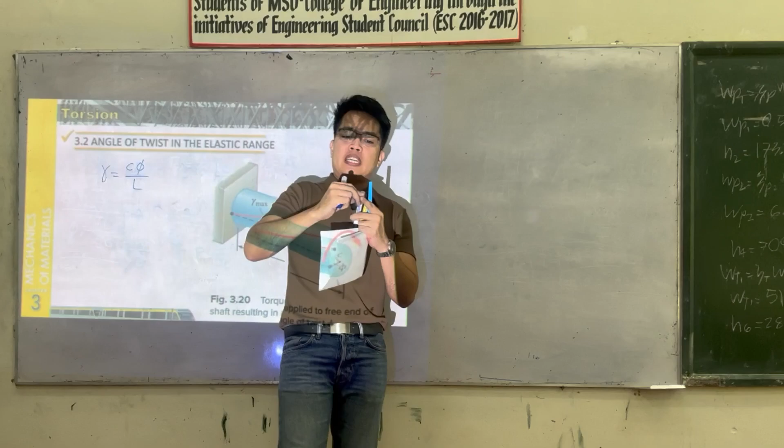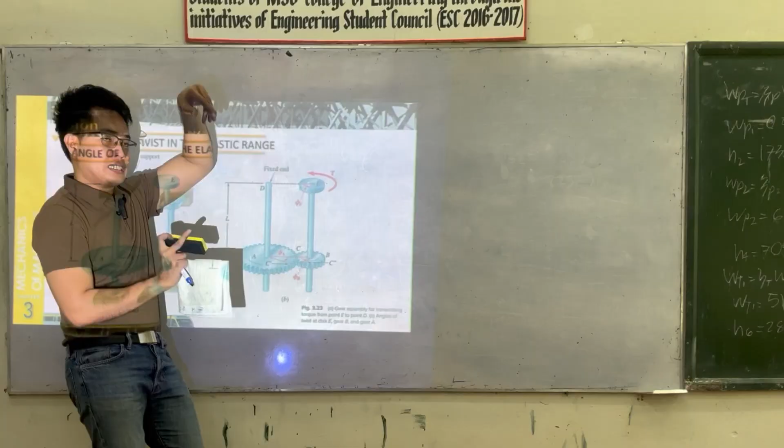This is Sir Jean Air AJ, welcome to Chapter 3 of Strength of Materials, Torsion, Part 7 of 7, Angle of Twist in the Elastic Range. Sample problem 3.4.

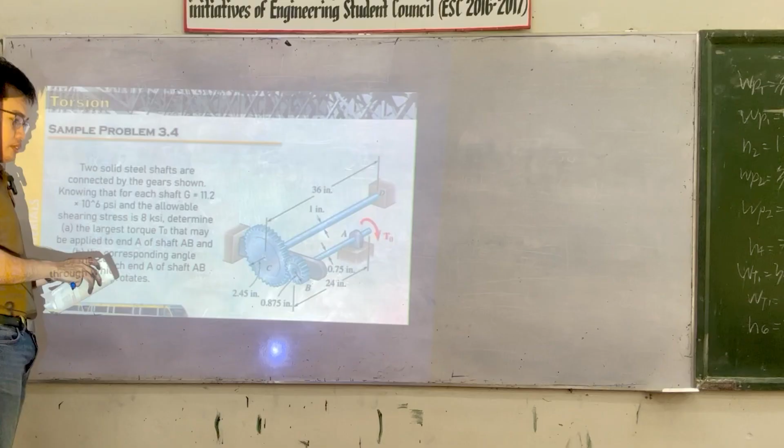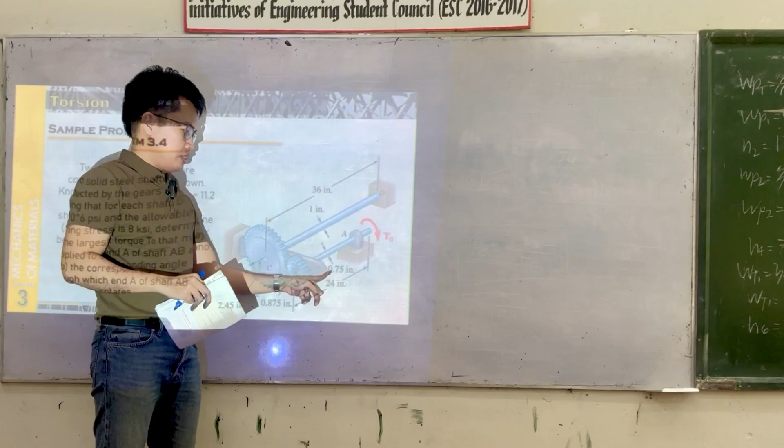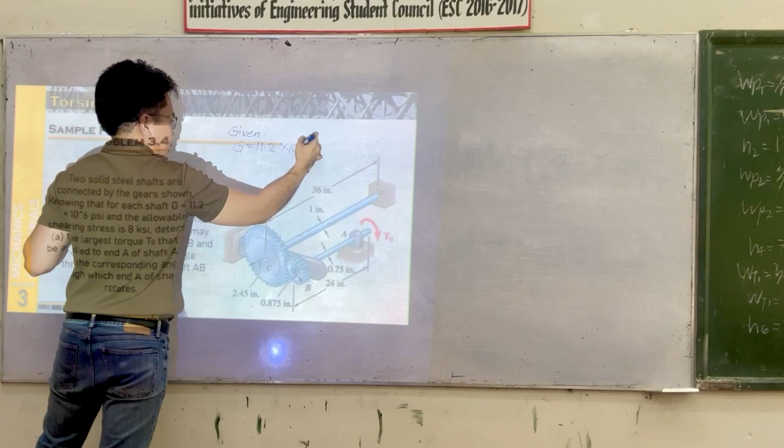Given: G is equal to 11.2 times 10 to the 6 PSI. And the allowed shearing stress is equal to 8 KSI.

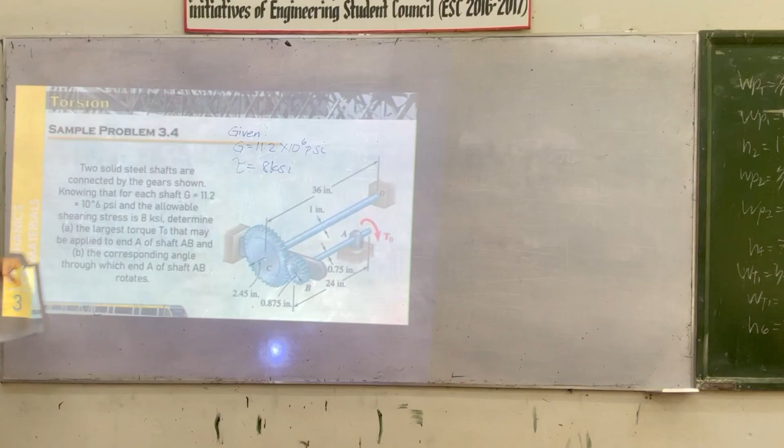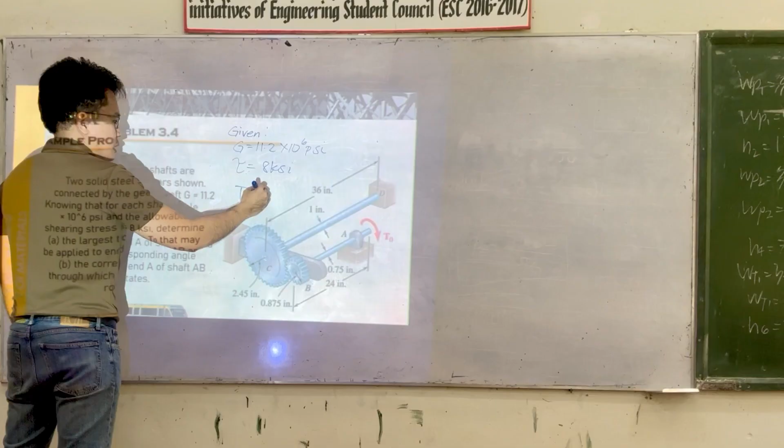The question: determine the largest torque T0 that may be applied to end A of the shaft AB.

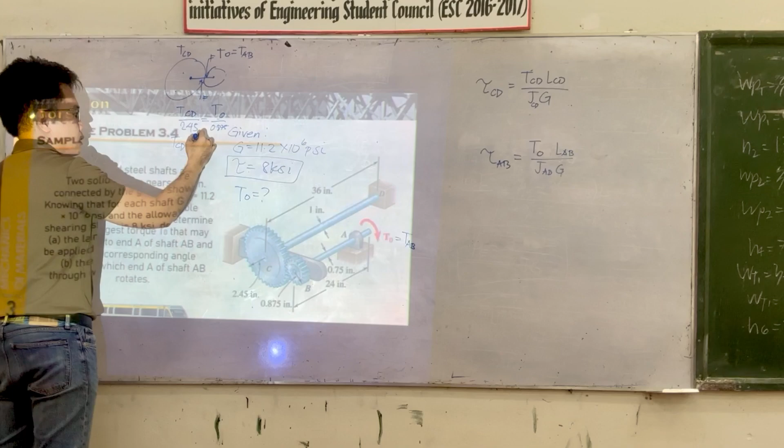So therefore, TCD over its radius 2.45 is equal to TAB, which is our TO, divided by the radius 0.875. So TO can be calculated using 0.875 divided by 2.45, or flipped: TCD is equal to TO times 2.45 divided by 0.875, which gives 2.8 TO.

Take note: TCD is just 2.8 TO times LCD divided by JCD times G.

Let's substitute. Our tau limit at 8,000 PSI is equal to 2.8 times TO times LCD, which is 36, divided by J, which is pi over 2 times 0.5 to the 4, times G, which is 11.2 times 10 to the 6.

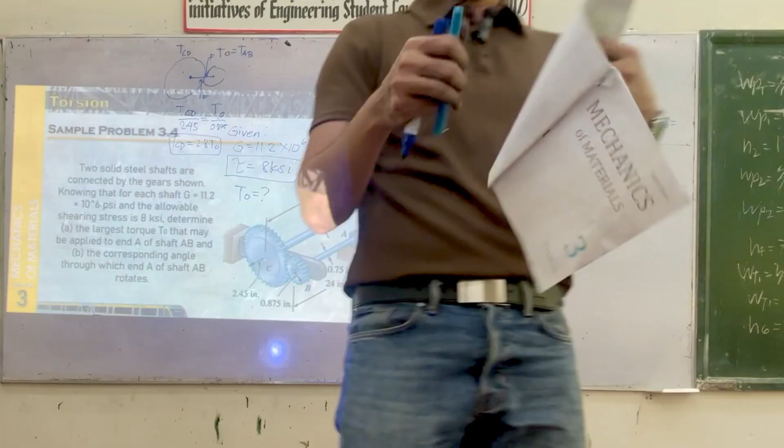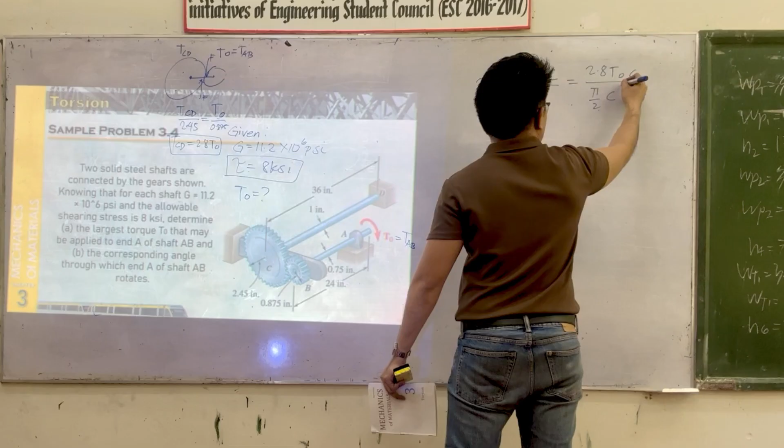So what is our shear stress formula? We have tau CD equals TCD times C over J. TCD is 2.8 TO times C over J, which is pi over 2 times C to the 4. This cancels out to become 3.

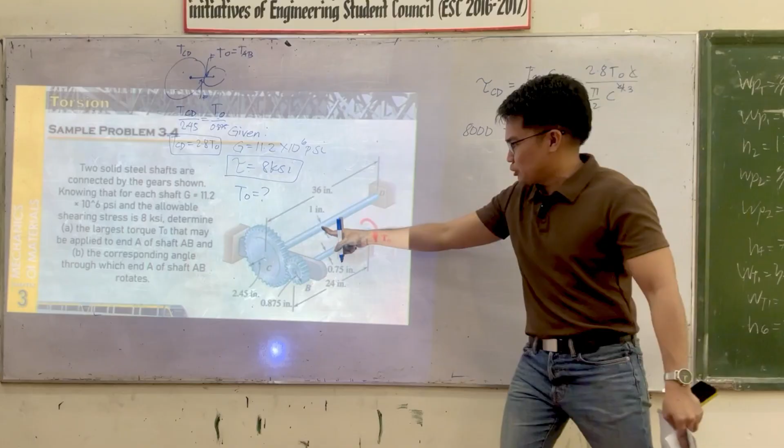Substituting, 8,000 is equal to TCD, which is 2.8 times TO divided by pi over 2 times the radius 0.5 to the 3. Calculating this, we get TO equals 560.9.

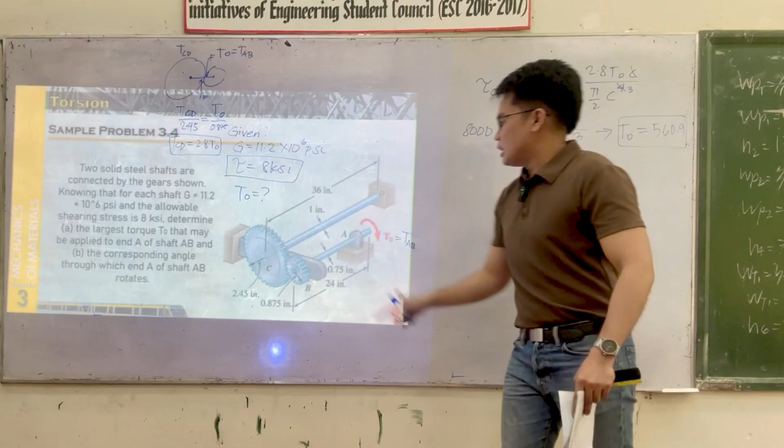Now for this other shaft, let's analyze shaft AB. The formula is TAB times C over J. TAB here is the same as TO. So this becomes TO times C over pi over 2 times C to the 4. The C cancels, becoming 3.

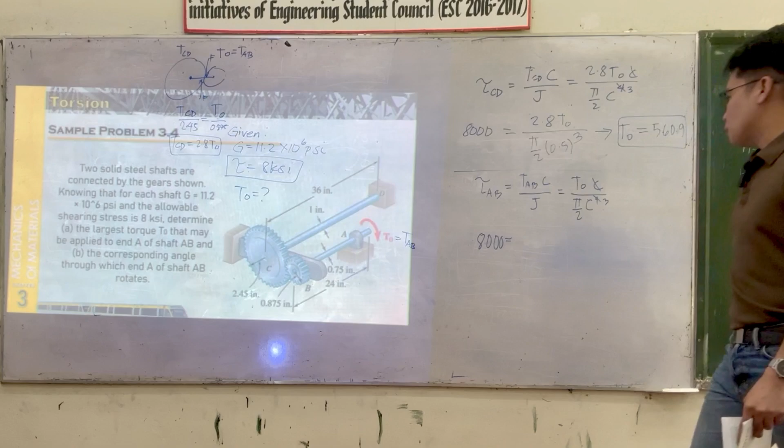Let's substitute: 8,000 is equal to TO divided by pi over 2 times the radius.

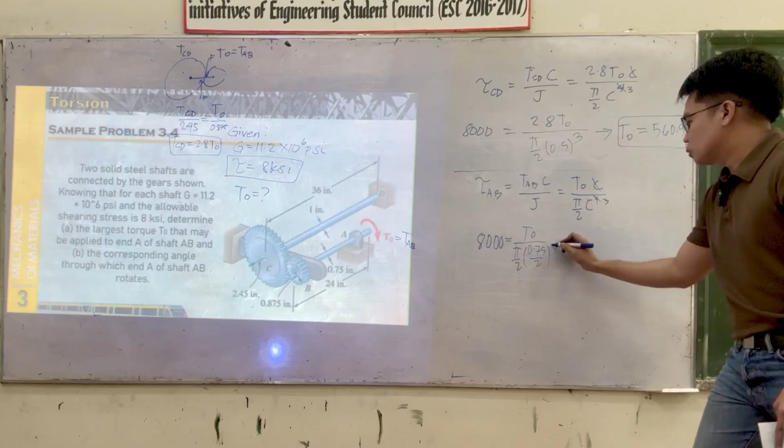0.75 divided by 2 to the 3. So ano yung makukuha natin dito ang TO? Ano yung makukuha natin TO dyan? 663, no? 663 pound inch. Pound inch. Ayan. So dito din, this is pound inch.

Sabi ng problem, sir, yung gamitin mong TO is 560 para hindi lumagpas ng 8,000. Sabi din ng isa, sir, yung gamitin mong TO 663 para hindi lumagpas ng 8,000. Kasi sabi ng isa, kapag lalagpas daw ng 560, lalagpas din sa 8,000. So ano yung pipiliin mong TO? This one or this one? Para masatisfy yung dalawa.

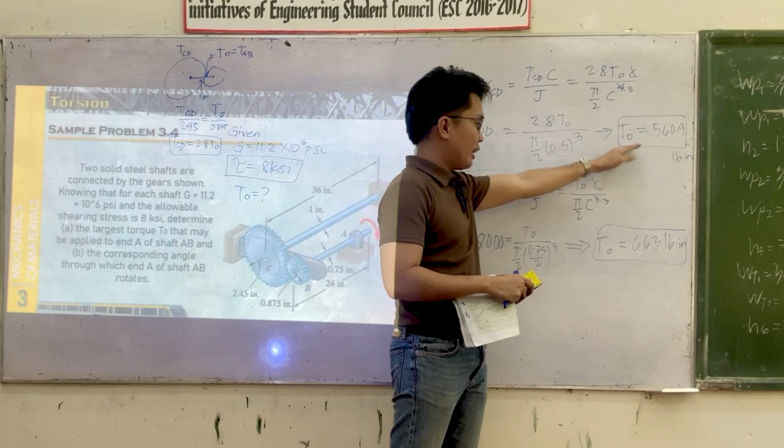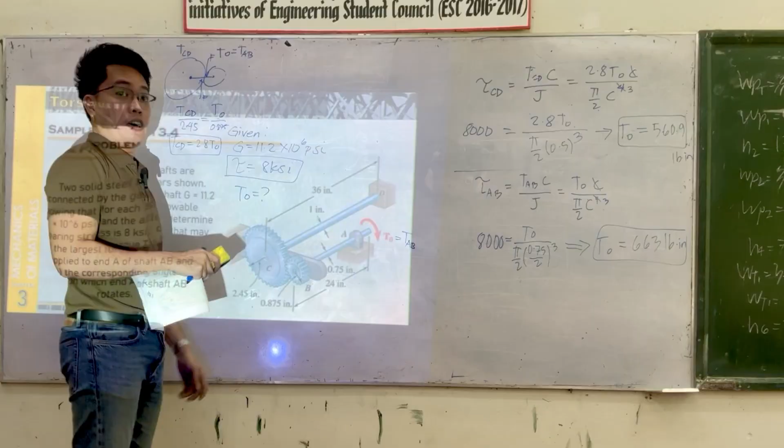The smaller, the bigger. The smaller, no? Kasi kapag lalagpas pa dyan, lalagpas na dito. So ito lumagpas, so for sure lalagpas na sa shaft. Anong shaft to? Shaft CD natin. Gets nyo ba, mga engineering kayo, no? So ayan, yung TO natin dito, ito yung piliin natin. TO is 560. Klaro? So ayan lang.

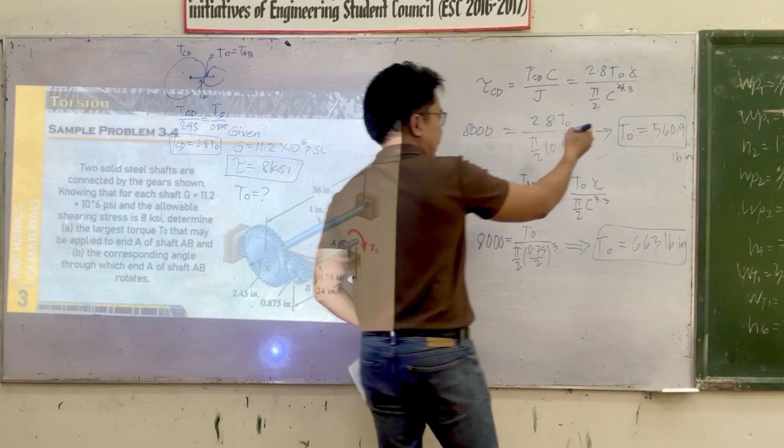So the next question: the corresponding angle through which end A of shaft AB rotates. So ano yung hinahanap? Ito yung answer natin sa letter A. How about sa letter B? Ano yung hinahanap sa letter B? Palagay nyo, anong variable yung hinahanap? The corresponding angle through which end A of shaft AB rotates, that is our theta, I mean phi.

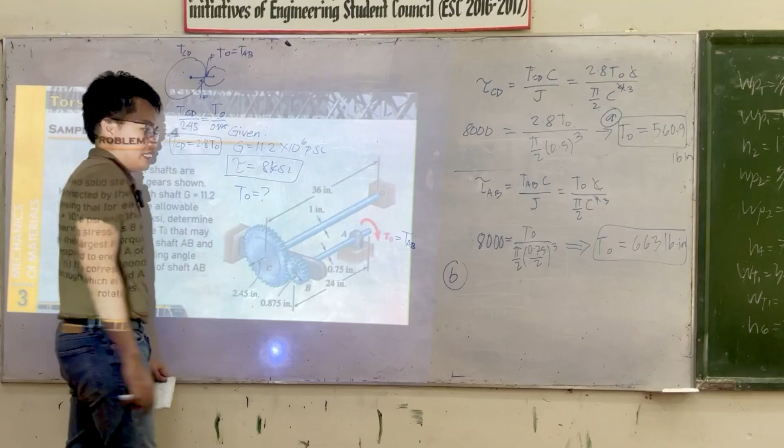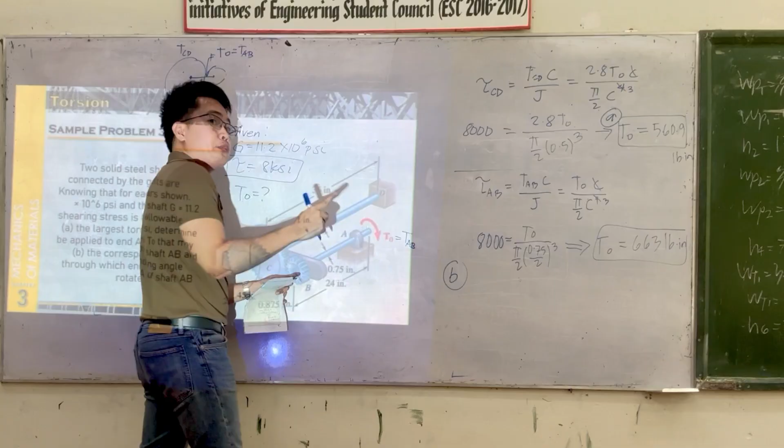The corresponding angle through which end A of shaft AB rotates, so yung phi A natin. But take note, yung A natin moves relative with B natin. So yung nakuha natin torque dito would somehow cause an angle of twist na phi A with respect sa B. So the angle na makukuha natin dito na hinahanap sa problem is yung phi A with respect sa B natin, kasi yung gagamitin natin formula is itong TO.

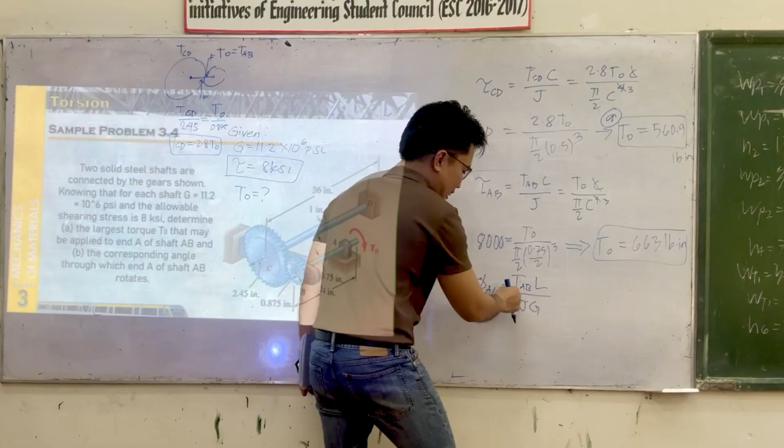So sige, ano yung angle of twist of A with respect sa B? Ano yung formula? T AB L over JG. Ano yung TAB natin dito? This is our TO. So ayan, so substitute lang natin.

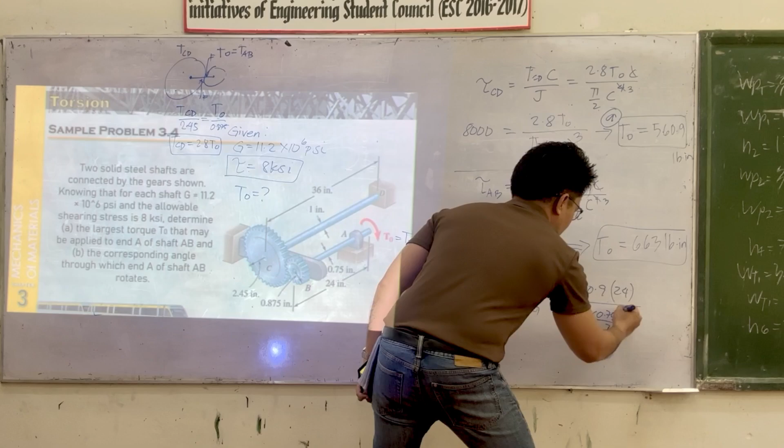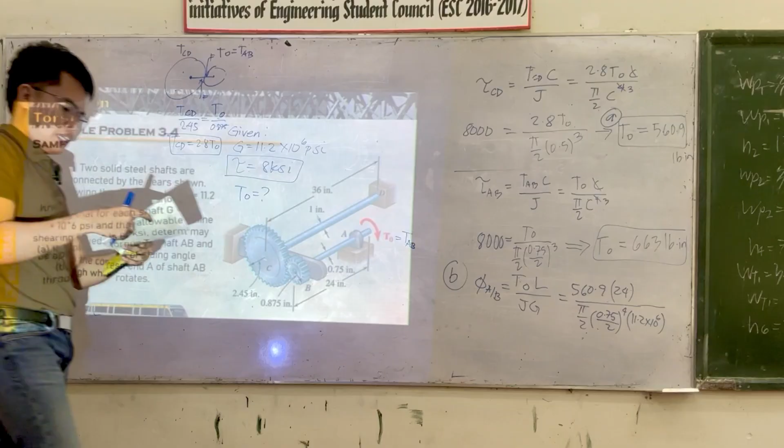We have 560.9 times the length is 24 divided by yung J natin, solid man. So we have pi over 2 times 0.75 divided by 2 to the 4 times the G, which is 11.2 times 10 to the 6. So ayan lang, the angle of twist, isulat ko na lang, no? It's 0.0387. Okay, right.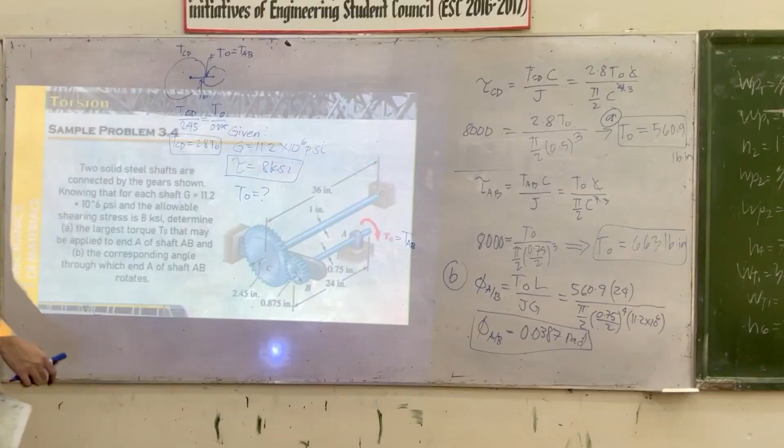So ayan lang, no? Ay, di pa tayo tapos. Angle A yung hinahanap, no? Phi A, sulat natin dito. Phi A with respect sa B is just phi A minus phi B natin. So ano yung phi B natin? Nakuha na natin yung phi AB.

How about, hanapin natin yung phi B. Ano yung phi B natin? Ano yung relationship ng phi B sa phi A natin? Kanina, ano yung mga problem? Di ba? RA phi A is just equal to RB phi B. So yung phi B natin is just equal to RA over RB times phi A.

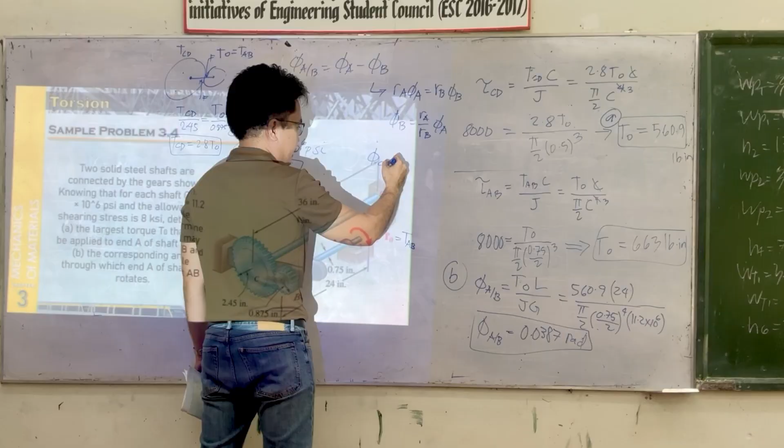Now ano yung phi A natin ulit? Di ba kanina, ano yung sabi natin? Phi BC, phi C with respect sa D natin—CD pala, no? Sa C pala to. This is C, yung notation natin mali, no? C. So ayan.

Yung substitute natin is phi B. So this one here is phi C. Tama? So ayan, ano yung phi C natin? This is phi C minus phi D. Di ba ito siya is fixed? No? So kung fixed to siya, this one is 0. So therefore, yung phi C natin is just phi C with respect sa D.

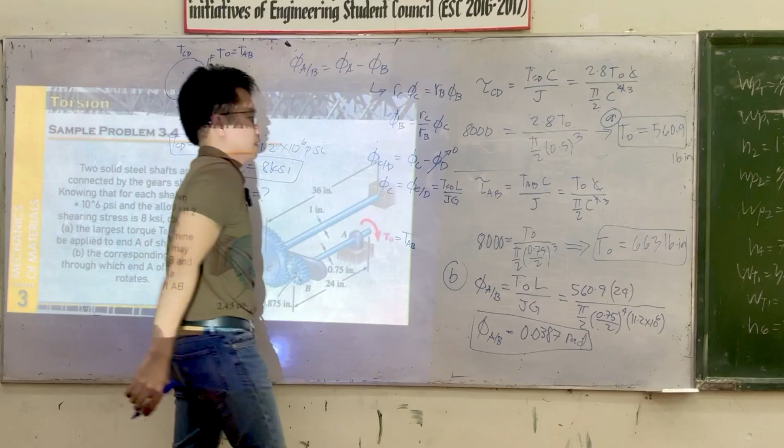Ano yung phi C with respect sa D? Yung angle of twist sa shaft na to. Tama? So ano yung formula? It's TCD L over JG. Sige, so calculate natin dito.

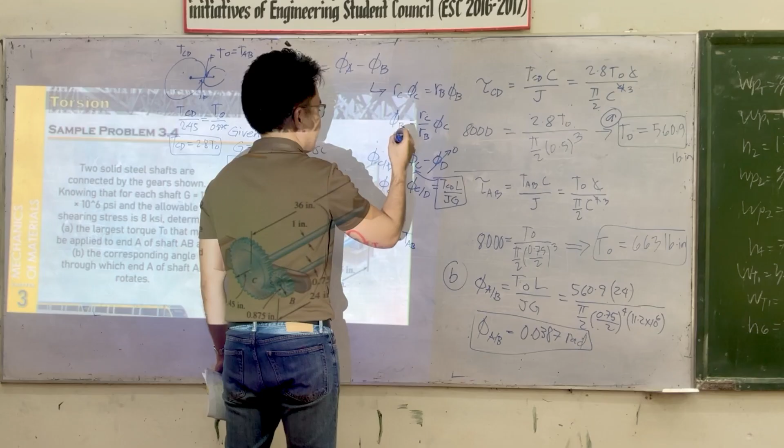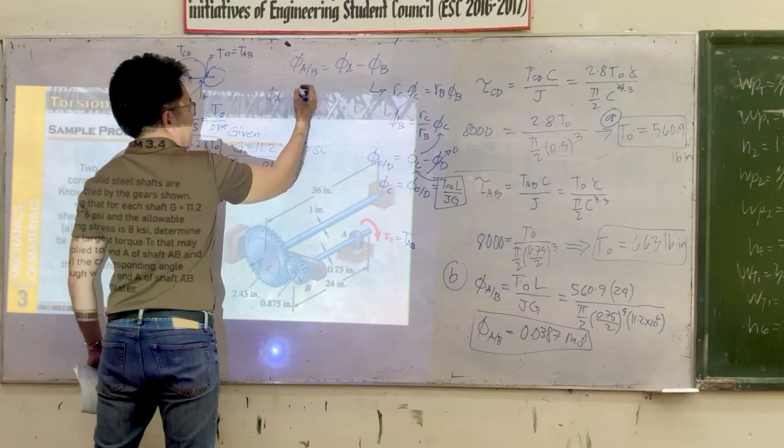Taasan ni, oy, ito na lang no? So this one here, i-substitute natin sa, this is our phi C. So this one here is the same dito. So ayan, RC over RB, then substitute natin dito. O sige, sulat na lang natin, no? I-rearrange ko lang to: phi A is just equal to phi A with respect sa B plus phi B natin.

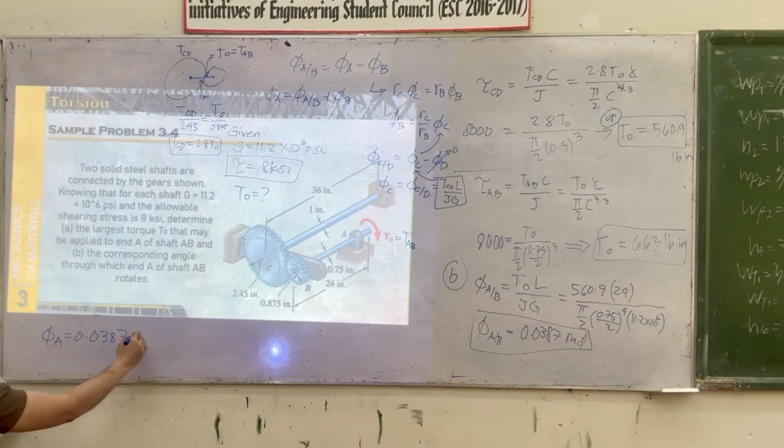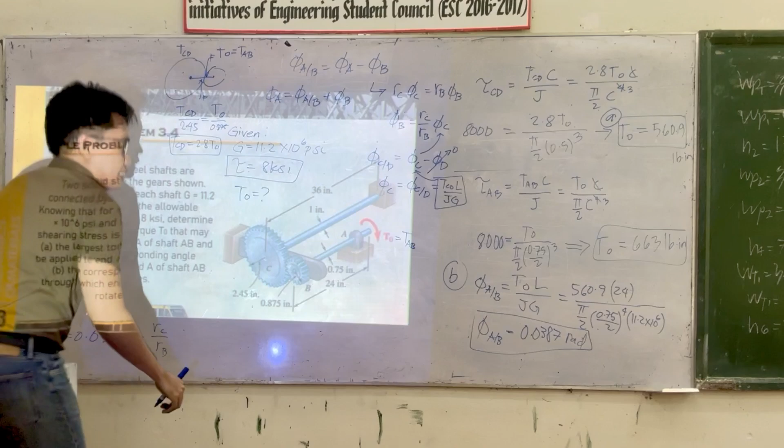So we have phi A is, ano yung nakuha natin phi A with respect sa B? That one, 0.0387. Then plus, ano yung phi B natin? Phi B natin is this one: we have RC over RB times phi C. Ano naman yung phi C natin? This one, TCD over TCD L over JG.

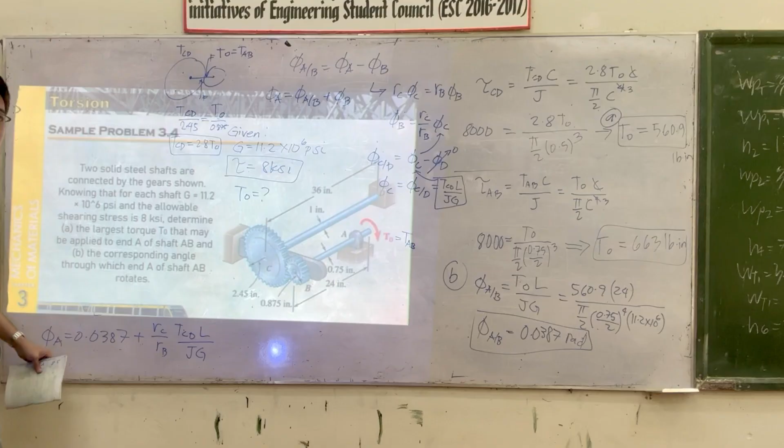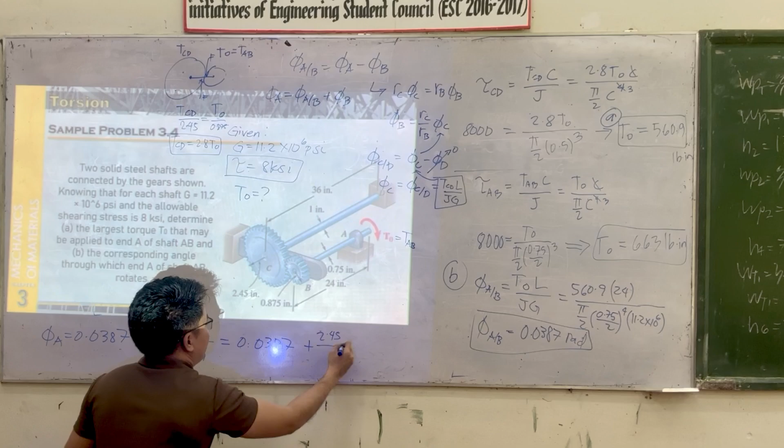Now ano naman yung TCD natin? TCD is this one, 2.8. So palitan natin to ng 2.8 TO. Now ano yung TO natin? Okay, 560. So substitute natin dito: 0.0387 plus RC natin, RC, this one is 2.45 divided by 0.875 times 2.8.

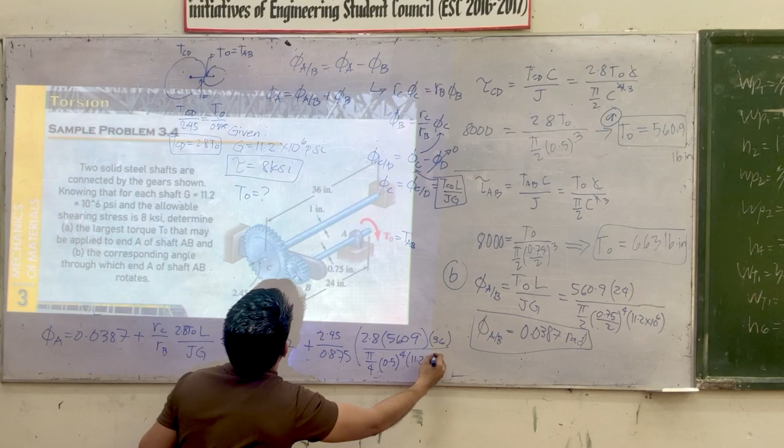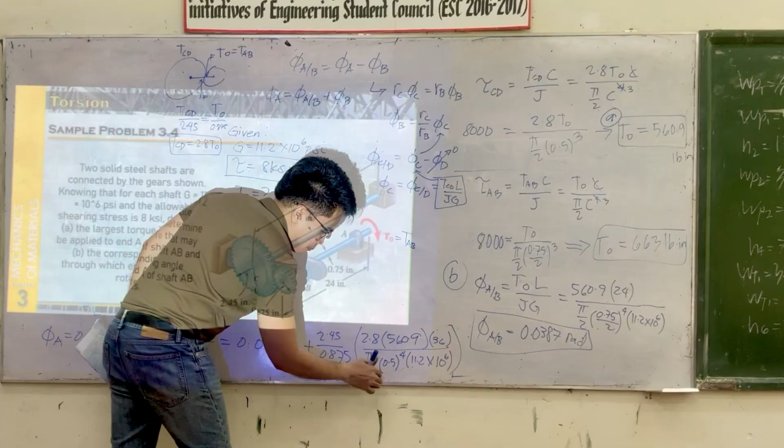Ano yung TO? 560.9 times the L, which is this one, no? We have 36 divided by J is pi over 2 times 0.5 to the 4 times the G, which is 11.2 times 10 to the 6. Ayan. Ha? Okay, this one plus points, another na naman, 4 points na. So ayan, so i-calculate natin yan.

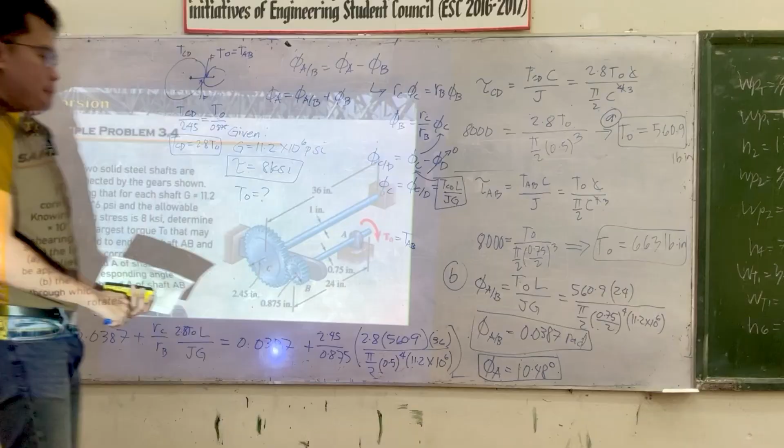Makakasolve tayo ng phi A equal to 10.48, no? Sulat ko na lang dito, no? It's 10.48, kinonvert na to sa degrees. Medyo confusing yung topic na to, but for sure may lalabas sa exam na ganito, so master this one.